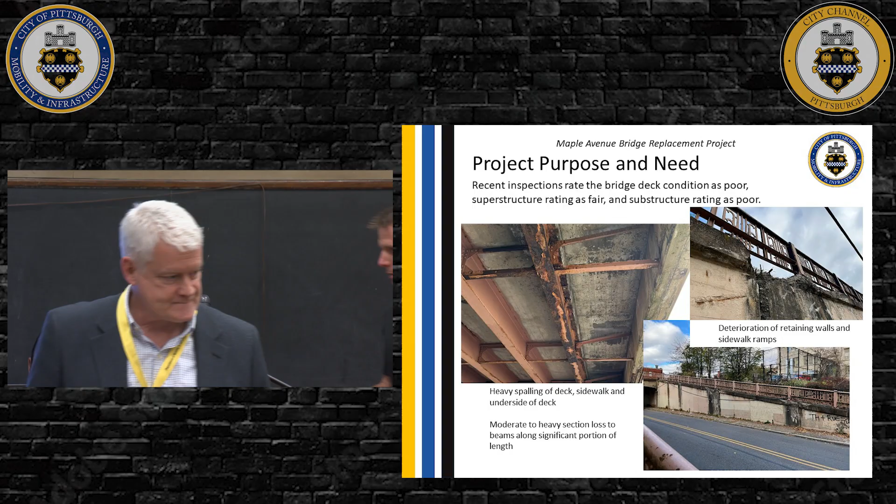So with that, I will hand it off to Alex, who is the consultant project manager doing the design. All right, thanks, Tom. Alex Schmidt, project manager with Stantec Engineers, also the structure engineer for the project.

This points too, doesn't it? It should. I don't know if it'll work. Oh, okay, yeah, it doesn't work.

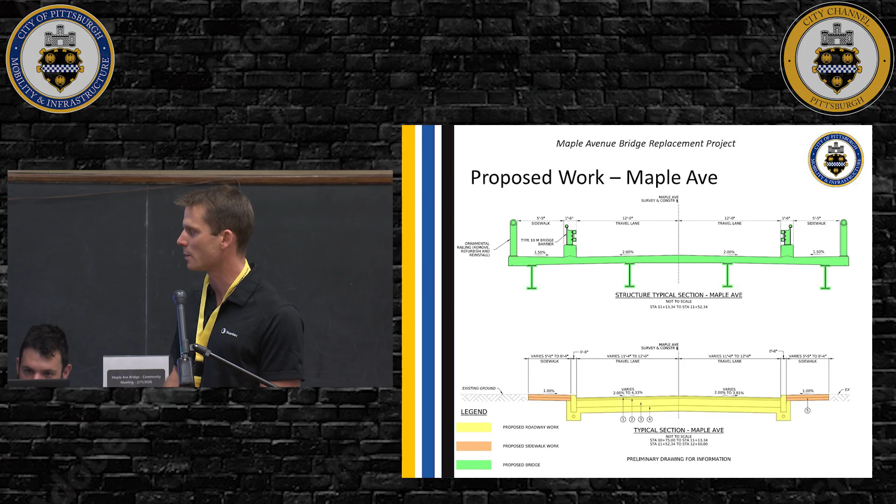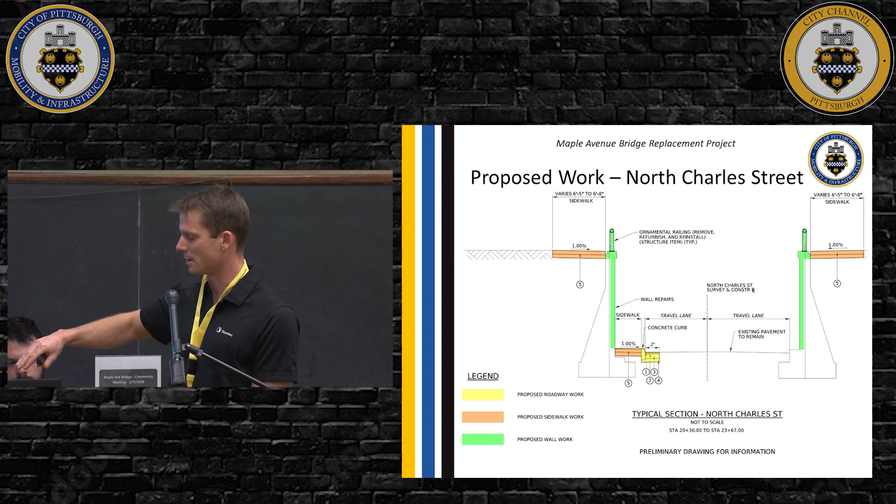Now down on North Charles Street, the green shows repair work for the walls. Again, we're not replacing those walls in entirety, just repairing them as needed. Also, it will be repainted, a color to be chosen later, to give it a nice finish overall. And then a replacement of the sidewalk and a little part of that curb line and a part of the roadway there as well.

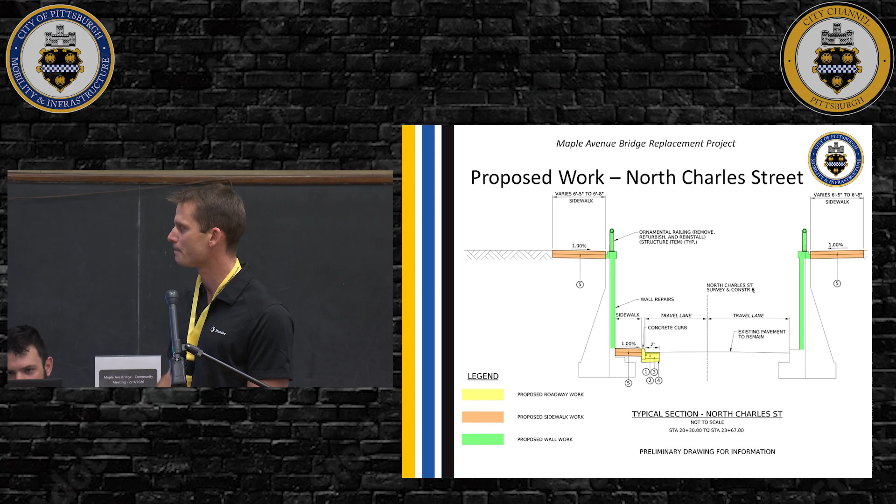Anticipated right-of-way impacts, permanent required right-of-way, there are none. These are unofficial, by the way, just so far in preliminary engineering, preliminary design. This is what we've come up with so far, and I can direct any questions afterward over to the board, where Jen and Jackie can help with any questions.

Temporary construction easements during construction, again unofficial, preliminary at this point, but we do anticipate 2 residential parcels. I'll show it on the next slide here, nice and big, and 1 commercial parcel as well. This may be necessary for construction activities.

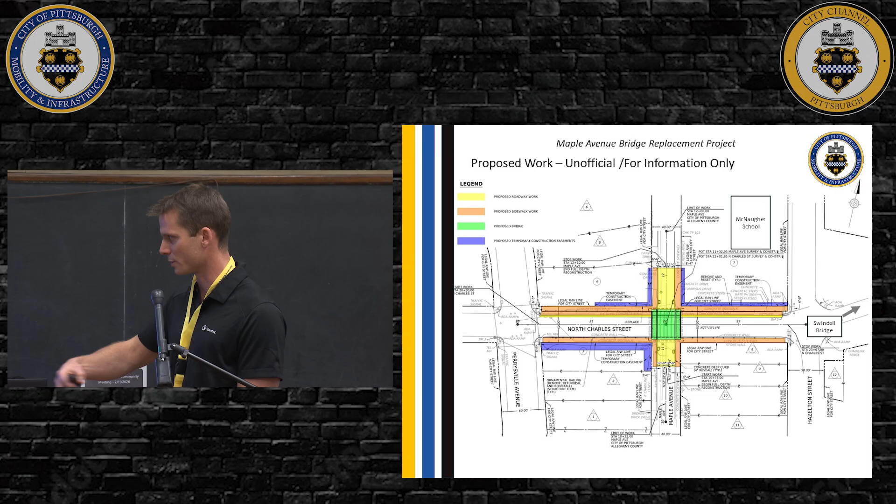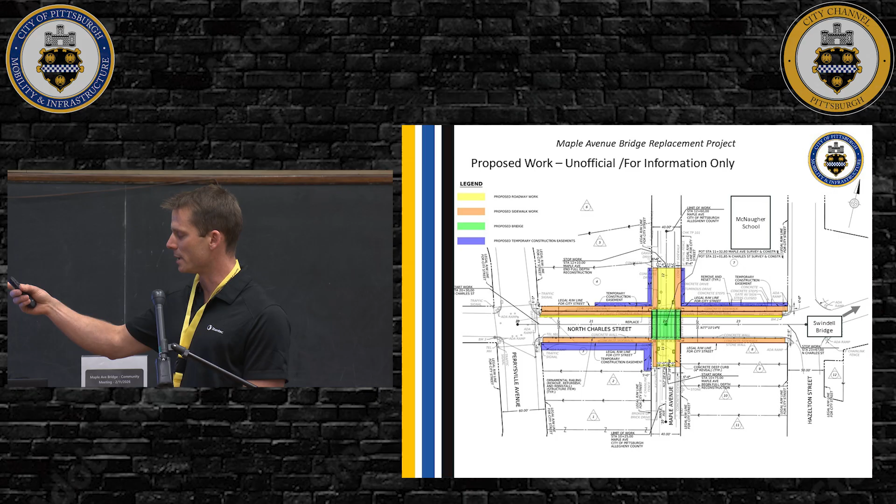And here in blue are those temporary construction easements. Again, just possible areas for a contractor to maneuver in, operate in, for construction workers to walk through, place some equipment as needed, really minimizing impact on both residential parcels on the north side there, and commercial in the northwest quadrant. And we're also just showing proposed work for replacing sidewalk, the replacement bridge in green, obviously, and repairs to the walls as well.

Proposed vehicular detour for Maple Avenue. This is traffic on Maple Avenue, just rerouted shortly, short detour time of about 2 minutes using Legion Way and McIntyre Avenue onto Perrysville.

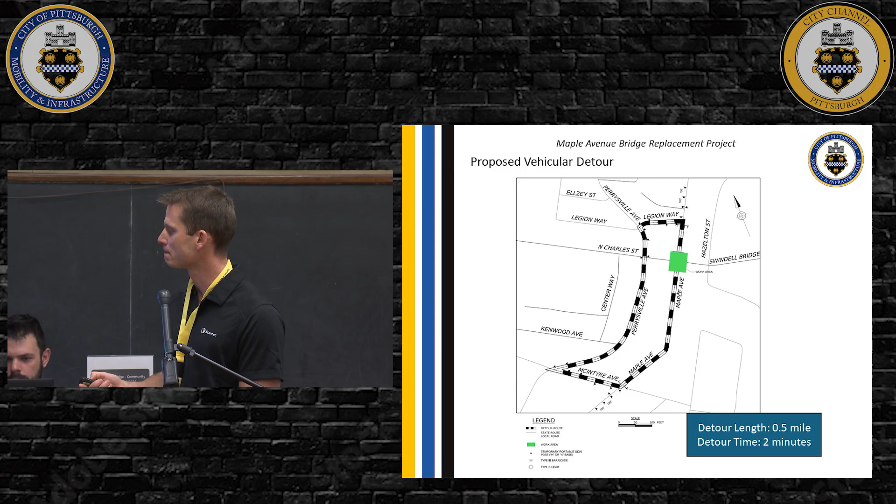And the pedestrian detour is similar. This is, again, for pedestrians on Maple Avenue. If you're on one side of Maple Avenue and wanted to cross over to North Charles Street, this would be the proposed detour to use.

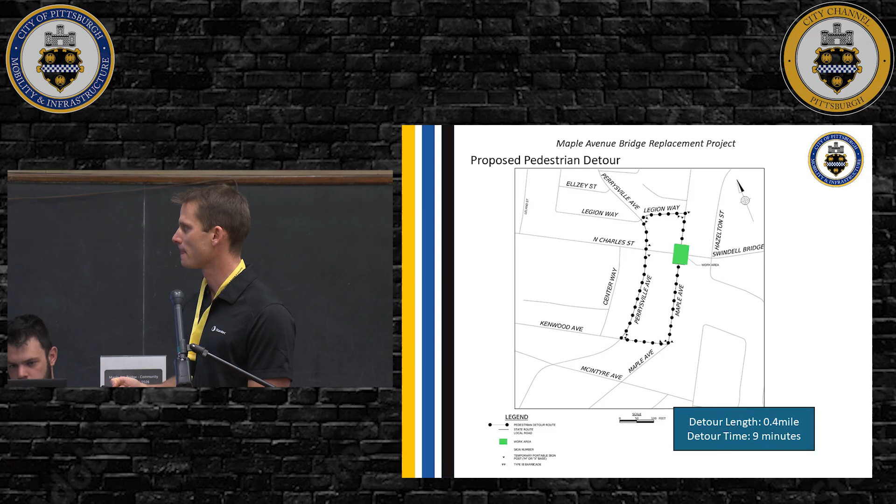Summer of this year, we'll be getting into and ultimately wrapping up final design and right-of-way acquisition if needed, with a fall 2027 date to advertise to contractors, and then shortly thereafter, that initial advertisement will be an anticipated start of construction, with an anticipated completion date of summer 2028.

Preliminary construction estimates about $2.1 million. That's current cost, preliminary engineering. Not everything is nailed down at this point in design. As we go into final design, that'll be more accurately determined. But that's where it stands now. Construction funding is about 80% federal, 15% state, and 5% city.